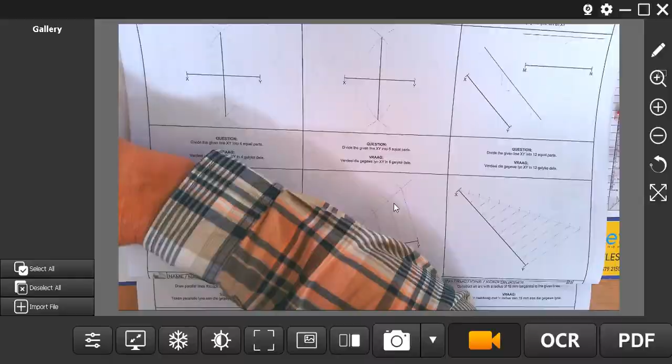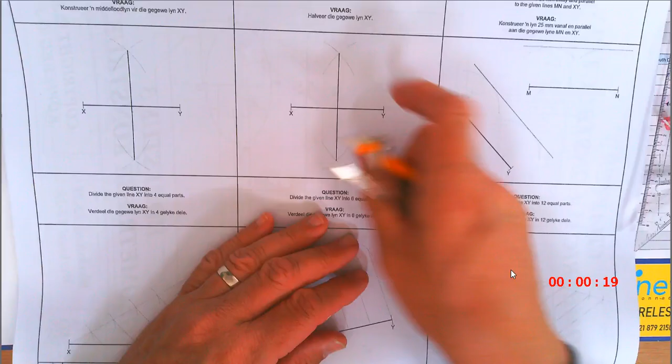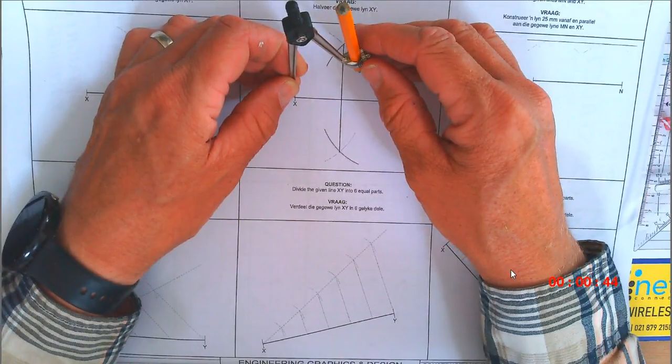So the first one, if you have to bisect a line - in the EGD book, grade 10, page 12 - this is revision. Open up your compass on any distance, the bigger the more accurate. Draw an arc at the top, an arc at the bottom, making sure your compass doesn't move. Then put it on the other side, draw a line there and there, and draw a line through the two. That will give you two equal parts, and it will give you a 90-degree corner.

Now, where do we use this? Where do we apply this same construction? If you go to page 16, you'll find the same construction here. They gave you a triangle, and you needed to draw a circle around it. So how did we do that?

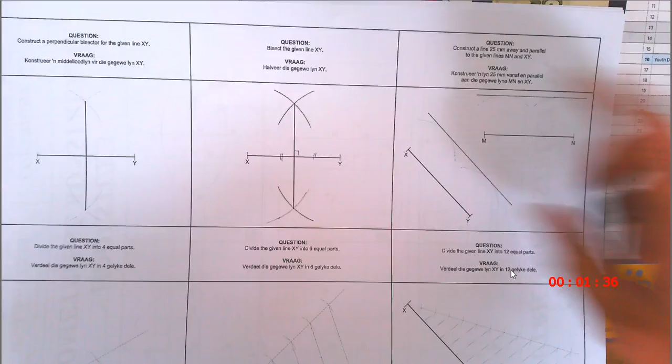It's very simple - the same construction applies here. Say we have line XY. You open up your compass, any size, draw an arc there, an arc on the other side, put it on the line, draw an arc there and there, and draw a line straight through those two points. I'll do that in pen for clarity. If I worked accurately, this should give me a line over there.

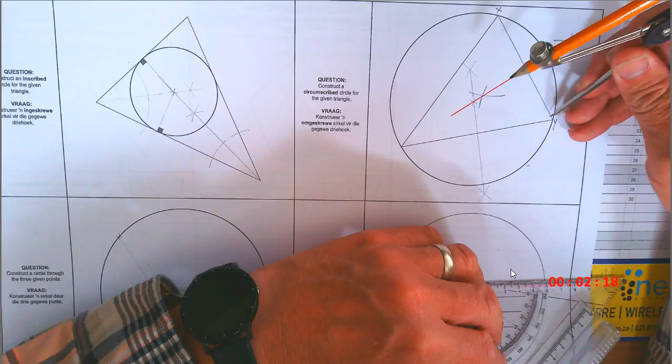So then I apply that with one other line - you can choose either one of the two. Open it up to any size you like, arc at the top, arc at the bottom, put it on the other side, and repeat, drawing a line through those two points as well. Where the two lines connect is the center point of that circle. If I now open up my compass to the edge of one of the triangle's points, I'll be able to draw the circle. If it doesn't go through all 3 points, check your accuracy.

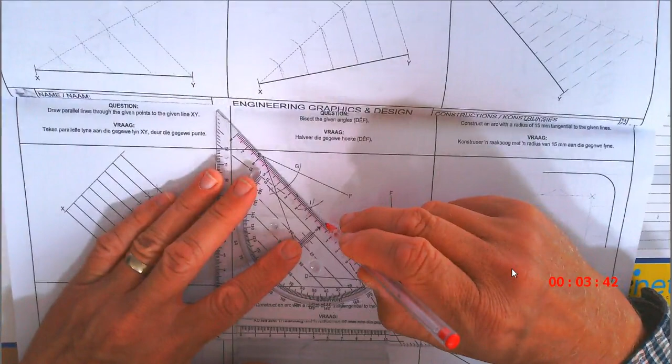So that was this construction - an application of bisecting an angle, one of the first constructions we did. That's this one over here, where you open up - it's two different things, I saw kids drawing a line straight through here, but this is different. Just open it up to any size, draw an arc there, put it on one corner, keep it the same size, draw a line there, put it on the other corner, draw another one, and there we go. The same construction is used when you draw a circle inside a triangle. Remember this one?

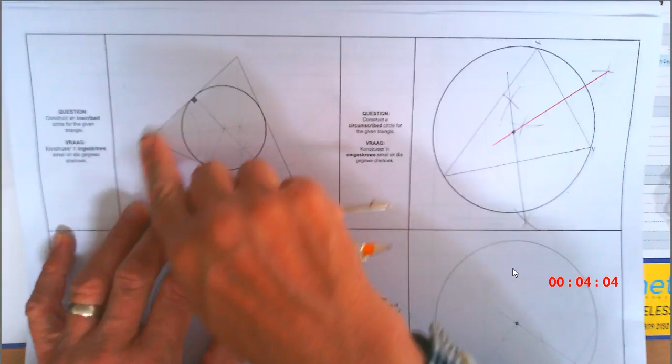This looks like the same thing, but it's not. Over here I bisect the lines because the circle goes around the triangle. With this one, I had the triangle and had to draw a circle around it. In this one, I have a triangle, but I have to draw the circle inside. If it's inside, remember the corners - I told you guys, the corners on the inside.

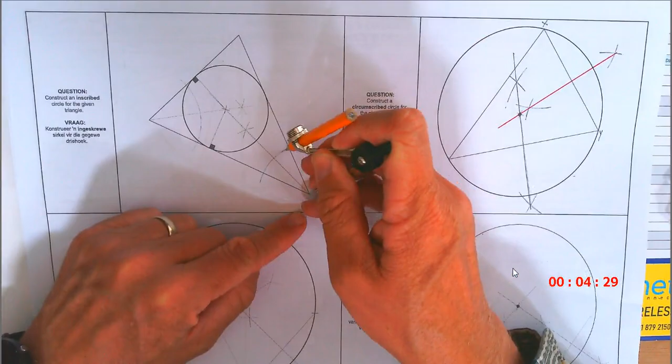So bisect, doing the same construction I just showed you. Open up to any corner, any two corners, put your compass there, and draw an arc here, keeping it the same size, draw an arc there, then draw a line through it - there's my one line. And you do this with any other corner, any other corner - you can do it with all three corners if you wanted to.

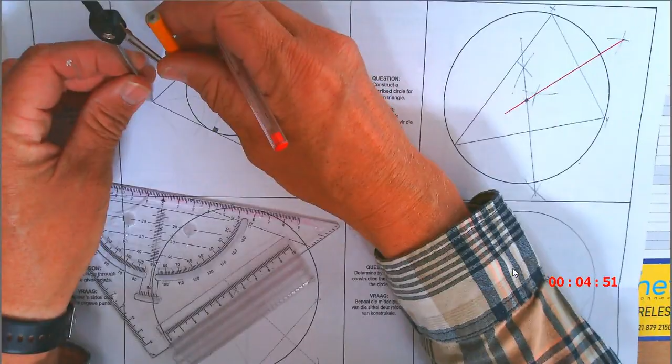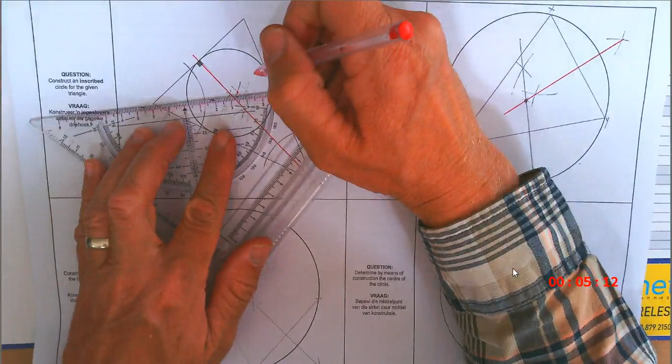Draw a line there, draw a line there. You can draw an arc straight through if you want to - put it on one corner, draw an arc, put it on the other corner, draw an arc, that's your center point. Draw a line through that point from that corner. Where the two lines intersect, that's the center point for that circle. So you put it there, open it up to any one of the sides, and you'd be able to draw the circle.

Okay, so I think that's quite simple. Unako, does that make sense? Alright, so those are those two.

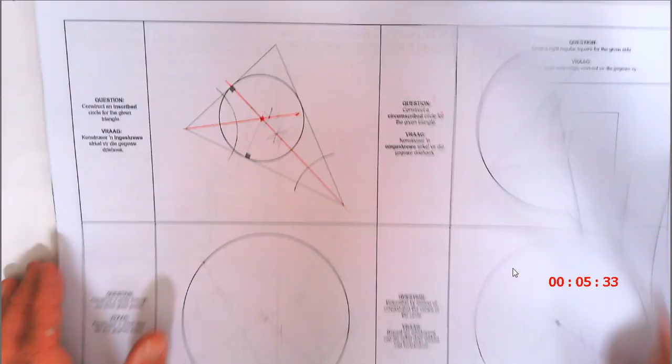Then I'm going to go back to this, since there were a few questions on it. I told you, if you've got a line and need to bisect it - I'll do this one on the corner, this is page 12. If you want to understand this, think of it like little exercises, like when you're building a house - this is laying the foundation, because you're going to need this in some other drawings we'll do later on.

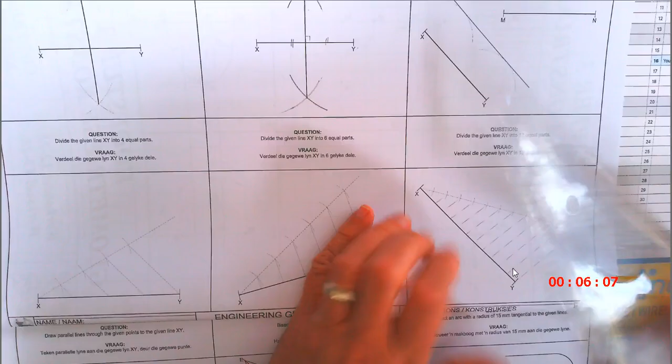For instance, if you're drawing steps - I spoke to a class the other day and asked, where will you use something like this? One kid said, when we're drawing steps. If I've got the height for steps and want to divide it into 10 or 20 steps, I can use this construction to divide it up into equal parts.

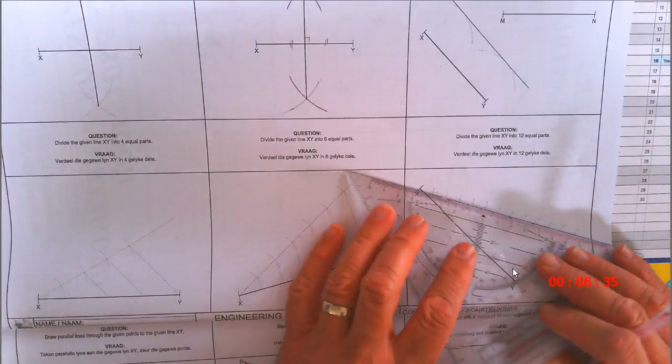Okay. I cannot do it with a calculator always, because sometimes it's a comma this and a comma that, which is a problem. Okay, so you have the line XY. You need to divide it into 12 equal parts. What do you do? Well, what would I do, what would you do?

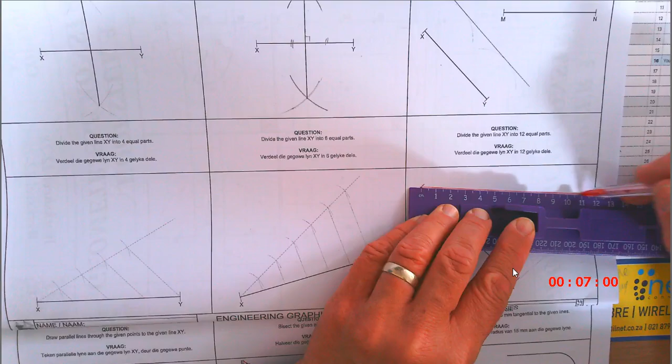You take your ruler and you put it on 0 and you mark off. I'm going to do it slightly different than they did. Same construction, but my own measurements. And I'm just going to do it here to show you that it will work regardless of the angle. So yes, I put it on 0, 12 marks. So I make a mark by 1, 2, 3, 4, 5, 6, 7, 8, 9, 10, 11, and there's 12. Okay, so there's my last point.

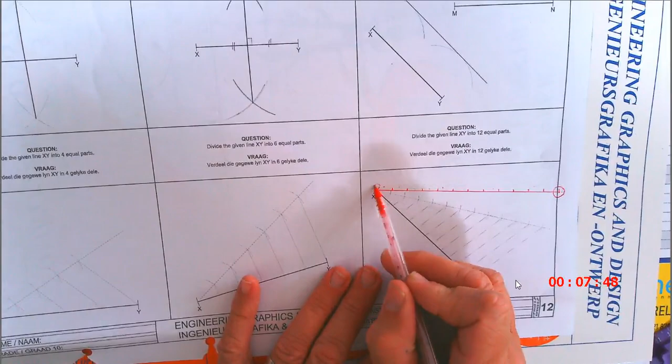Now I'm just going to remove this page quickly. Okay, so I'm going to use the last point on this line. Check, there's 13 points, but there's 12 spaces. 1, 2, 3, 4, 5, 6, 7, 8, 9, 10, 11, 12. That's why I put it on 0 and I end by 12. Right, then I take the last line there and I connect it to the last point on the line. Guys, see it there? So the last point on my line to the last point on the given line. That gives me an angle.

What I do now is I use a ruler and a triangle together. And I put it on this line exactly. And now I just move my triangle to the next mark on that line and I draw it. I do the next one.

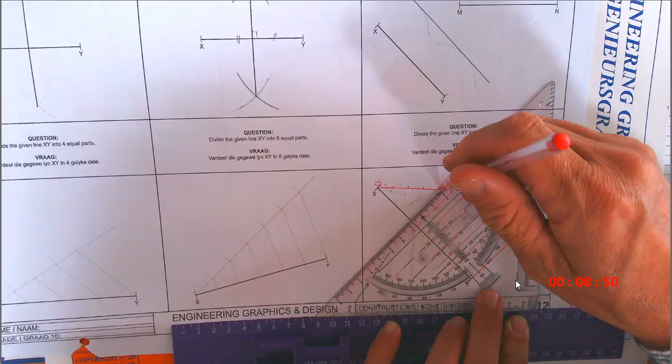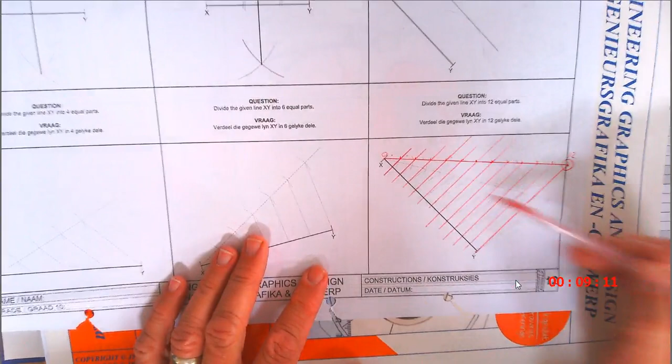Okay, look quickly there. Now my line is divided up into 12 equal parts. They had a different angle, they got to the same thing. Now if you do 6 parts, it's the same construction. You're going to put it by 0, 1, 2, 3, 4, 5 and 6. You connect point 6 to the last point on the line, get the angle, put the ruler and the triangle together, shift it onto each number, and that will give you the divisions that you're looking for. Okay, so that is quite simple. I think that's going to be a walk in the park for you.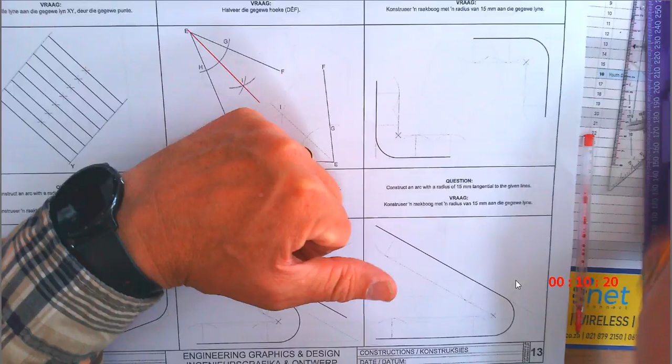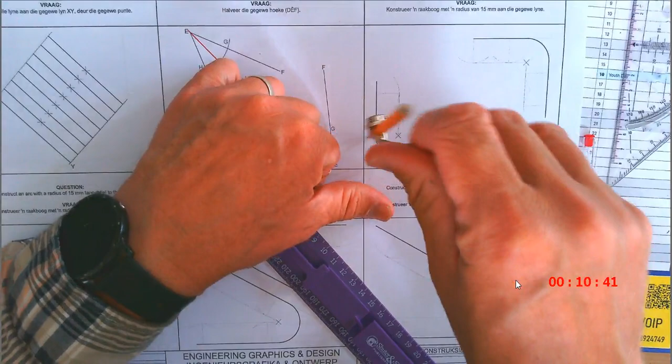You had to set your compass to the size, which is 15 millimeters. Then you had to go anywhere on that line. You had to draw an arc. You had to go anywhere on that line. I would go to the edge. That's going to be more accurate. Draw another arc. And now I draw that line in.

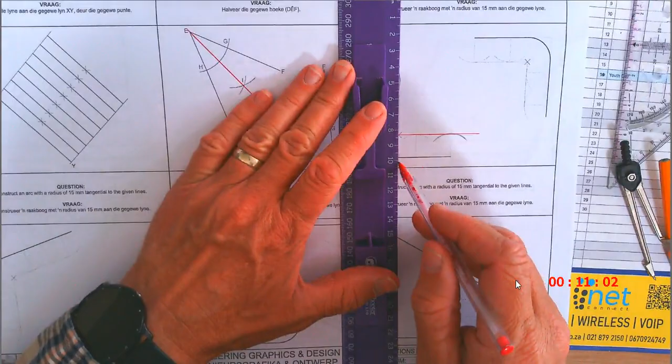There's my first line. Then I had to repeat that. Keep it on the same size. Draw an arc here. Draw another arc there. What is the radius? 15? It's 15 millimeter. And I draw it. That gives me a center point. Guys, that center point is where you open up your compass and where you draw this arc there. Can you see how easy it is? The same thing applies there.

If I get an acute angle, nothing strange, the same construction applies. Same radius, I go to the edge, I draw an arc of radius 15, I go to any other place on that line, I draw another line. I would go further because it's going to give you a more accurate line. I draw it through that, make sure you work accurately. I draw a construction line.

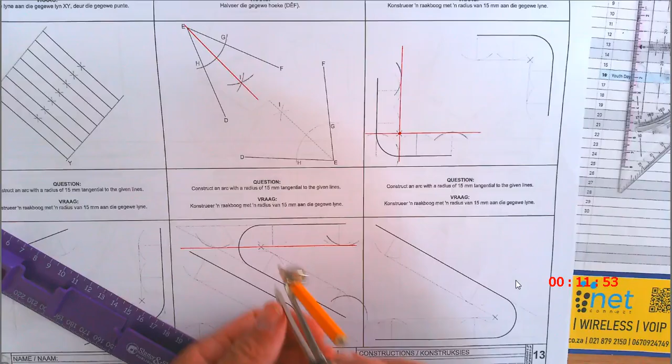This is two different things, right? So I'm going to do this one too. I'm going to draw an arc here. I'm going to draw another arc over here. Right? I'm going to draw a line through this as well. Where the two meet, I get a point. Now you're going to say, sir, what now?

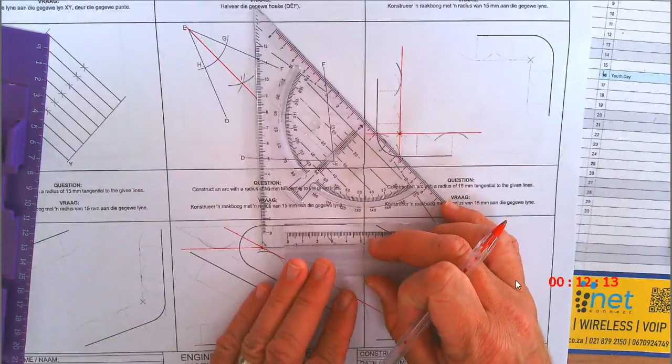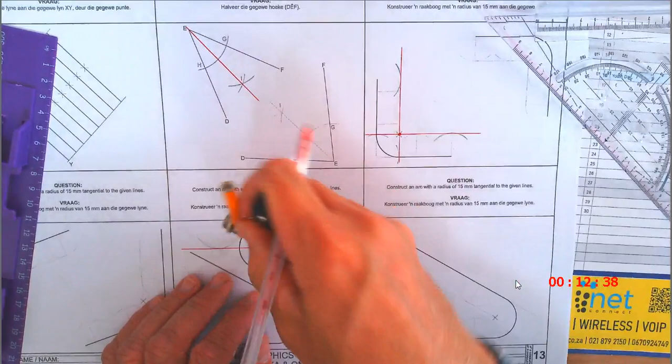Okay? Same story. By that point, you can put your triangle down at 90 degrees. Make a little line there, a 90-degree line. That will give you the starting and the end point there. You don't have to, but that's how I would do it. Put your compass on that mark, open it up to the top, and there you go. If you work accurately, it should fit in perfectly.

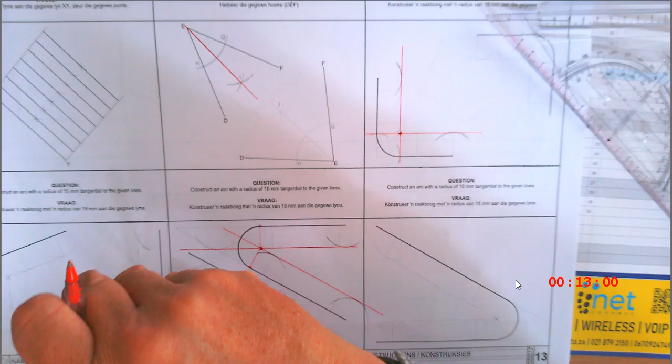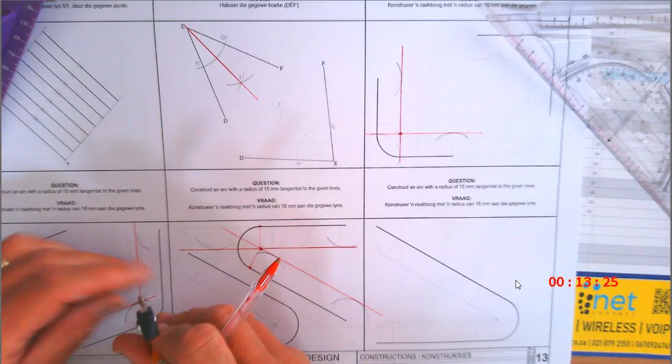Also, open up your compass there. On that corner, open it up. There's my arc. Easy. Okay.